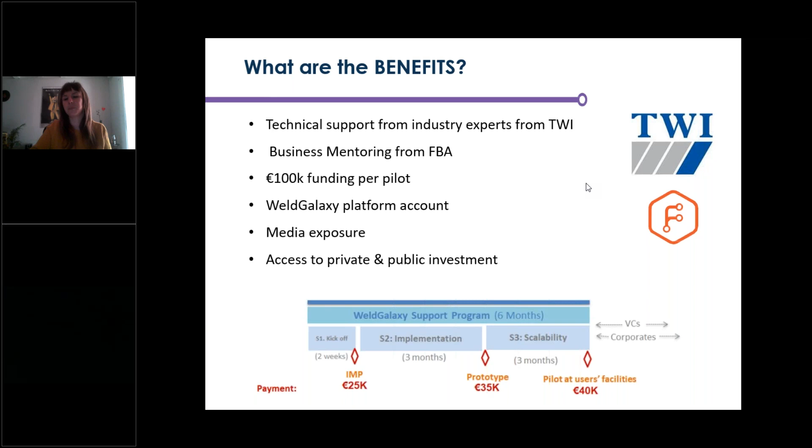And of course, media exposure. By being part of this European initiative, we make it possible to make your success story visible, and also, if possible, to help you with further funding when the project and support ends. So the benefits are multiple.

And who are we looking for? It's important to remember that we are looking for Arc welding solutions specifically, and for solutions that are disruptive and innovative, that actually bring something to the sector.

This will be commented on further by Geoff, but it's important to note it could be either a process, or equipment and consumables. There are different ways to think about innovation—it doesn't have to be only equipment. Processes could also be innovative and bring a lot of innovation and disruption to the sector.

From the legal point of view, we accept the proposals. You can apply as a single applicant, as a single company, or as a consortium.

But what is important to take into account is that your company needs to have an SME or mid-cap status, at least one. If you apply as a single applicant, you need to be the SME or mid-cap. If you apply as a consortium, then at least one company needs to be SME or mid-cap.

If that is a new definition for you, just to let you know how to evaluate or assess if you have this status: you have to check your headcount and annual turnover and check the limits included in the guide for applicants. You can also check the European rules for that, but these two elements are the core when assessing this.

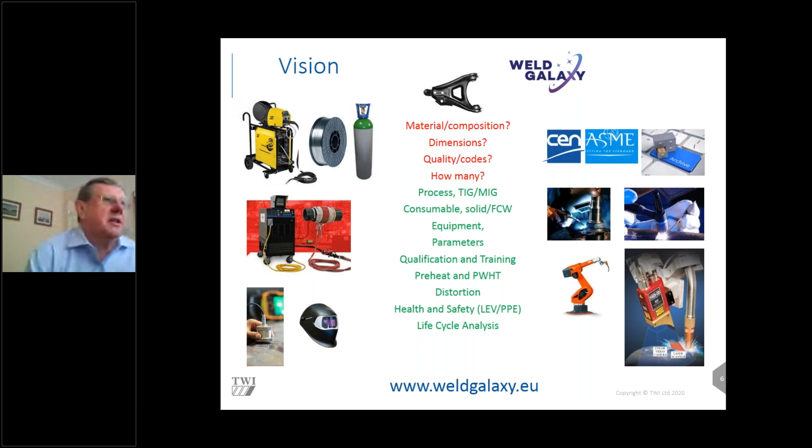There are other aspects too. There are tools on the database for predicting distortion, doing life cycle analysis, etc. So many aspects to the database, but it's all to do with coding knowledge, taking that knowledge from TWI, from equipment and consumable manufacturers, and coding it in a certain way so that it can be accessed in the database.

And here we are, this is the WeldGalaxy platform. On the platform we have knowledge pages. You can go on the platform and look up information about products and processes, and also tools to help you make those decisions in terms of process selectors. There's a tool to look at distortion, and another tool to look at health and safety and environment aspects of the welding process. It's accessed either through the chat box here or directly through typing information into the platform.

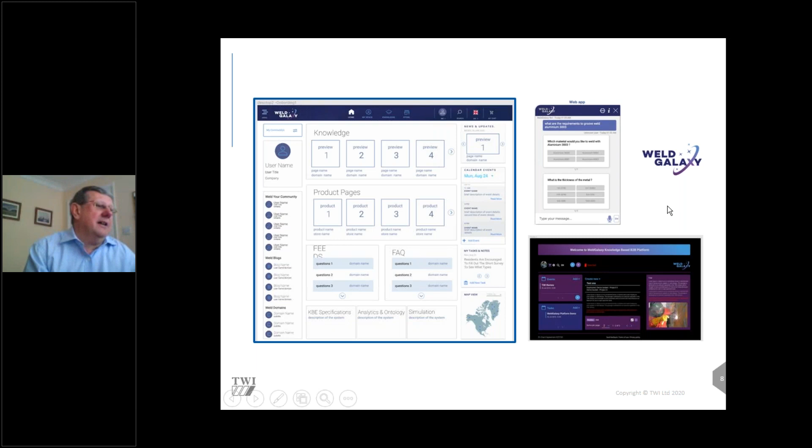This is the realization in the nice WeldGalaxy color scheme. If we look in a little bit more detail, we have the login, the user interface here. Our users will come into the WeldGalaxy platform. The selection of the process and the consumables is done here. We have knowledge pages, and you go in there and find out information about various processes and aspects of welding.

This leads us through to a selection of the appropriate products that can be used for a particular welding application. They go in the basket, and then we come into the more commercial side where we have the suppliers of those products, and then we can go through that transaction, which may be quite simple, maybe just on price, or it may be on performance. It could be simply somebody wants to buy a new item of welding equipment, or somebody looking for a new way to produce a product, needing the whole production line, which will be the equipment, the consumables, the robotics and sensors. So the WeldGalaxy platform offers a safe and secure way of going through that process of selecting a supplier of your products and engaging with them on a commercial basis.

So that is the WeldGalaxy platform, very briefly. To find out more, you can go onto our website, www.weldgalaxy.eu, which has lots of details. It has press releases and a lot more detail about some of the things we're doing in the WeldGalaxy project.

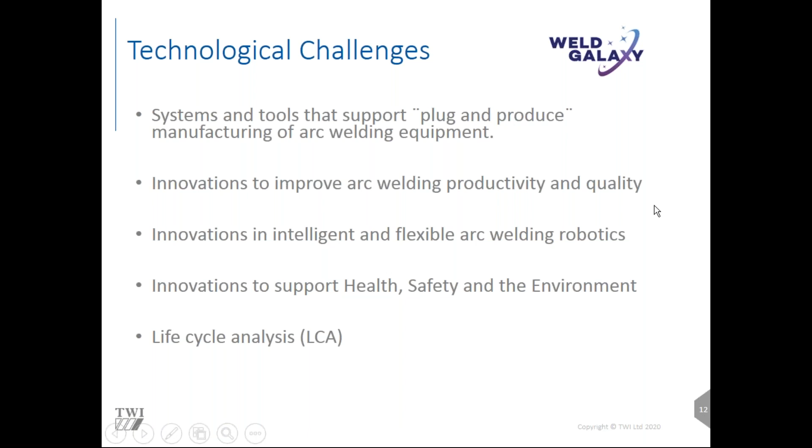Hello, can you hear me? I'm afraid I lost my connection. Yes, yes, we can hear you now. Great to see you back. We lost Geoff around 90 seconds ago - you were about to say you're going to give more details on something, and then we lost you. So if you could pick back up from there, that would be great.

Thank you. Well, not to lose any more time, and apologies to everyone about my dismal internet connection - it's a problem we all face from time to time. It's always unfortunate when it happens during these presentations, but I'll swiftly move on, and hopefully we won't have any more disturbances. I'll give you a little bit more detail about the technological challenges.

The first one is systems and tools that support plug and produce manufacturing of arc welding equipment. Plug and produce - people ask me what that means. To me, it means an item of equipment primarily which can be added to a conventional welding system, whether manual or robotic. You plug it in and it starts producing product, working with the existing welding equipment.

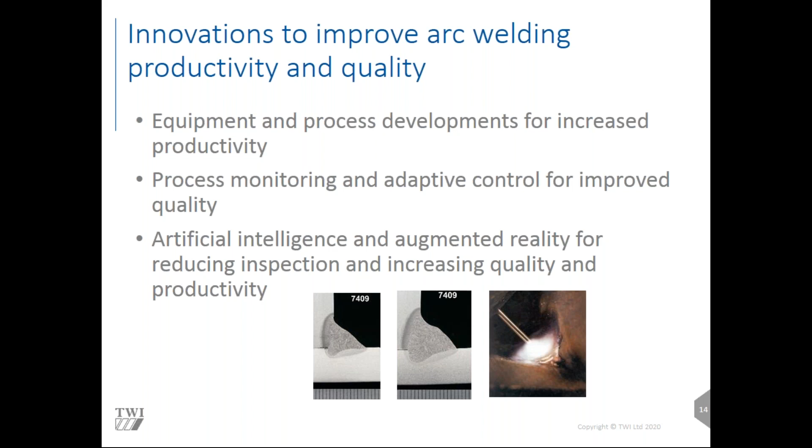Particularly, we're looking at innovations to improve the process - to improve the productivity and quality of an arc weld. There are a number of innovations that have come through in recent years using developments in control, computing power and power electronics, which enable us to make better welds, whether using multi-wire processes to increase productivity, or giving us increased control over the welding arc to improve quality, reduce spatter, and improve consistency. So we're looking at projects that tick these sort of boxes.

We then have robotics. Robotics increasingly becomes important for us, and we'll be looking for seam trackers and sensors - we have a number of projects already in the first call. Also innovations in how we use robots and sensors, using artificial intelligence to tell us more about the process, developments in fixtures and fixturing, and positioning of welding components. You'll hear about one of the very interesting projects we funded in the first call in that area.

We then have also innovations to support health, safety, and the environment. These are increasingly important topics, and there have been recent European regulations in terms of energy efficiency of welding processes. So we're keen to find projects in this area, particularly because these projects need to feed into the WeldGalaxy platform as well. We don't want to look at these projects in isolation - we want the successful pilots to engage on the WeldGalaxy platform to test it, and provide more data to build up the knowledge embedded in the platform for making these decisions.

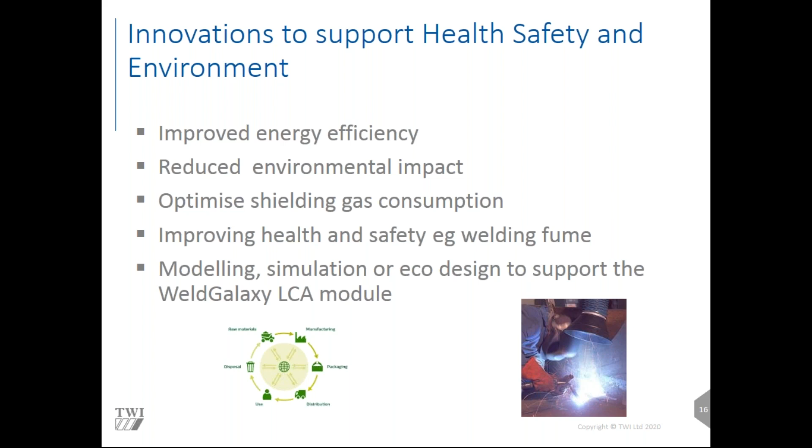So that, very briefly, and apologies for the delay there, is what we're looking for in the projects for this second call.

Once we choose those projects, we will start working with them, with you, with 15 projects, and we do that in two ways: there is technical support from TWI, and there is also business mentoring from FundingBox.

So we have facilities that can be used as a test bed for your innovations, and it's been difficult this last year, as you would already know. We're running the first set of projects, and it's been extremely difficult during the pandemic to organize this sort of support that we hope to provide in the project, where companies can bring their innovations to TWI and we can work with you to evaluate and improve them.

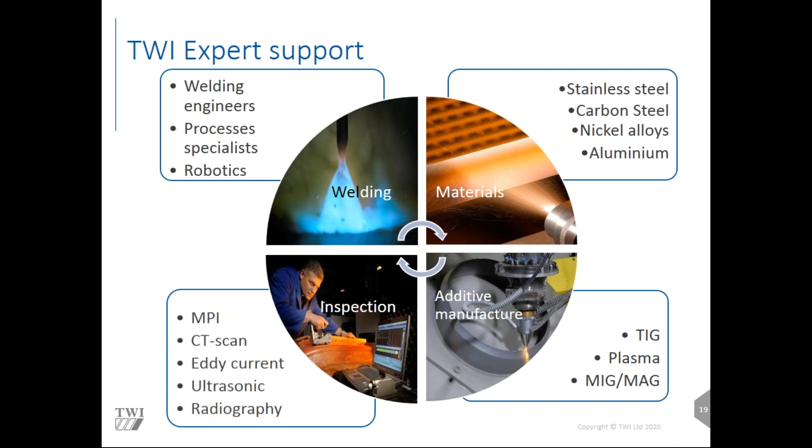So not only do we have the experience, we have the resources, and we have the people, we also have a library on site, and we have a number of information scientists, and they can provide support in terms of literature reviews and other information that may help you develop your innovations, as well as all the information on the TWI website, which includes technical articles, best practice guides, knowledge summaries, etc.

And much of this information is actually being embedded into the WeldGalaxy platform as well, and this is available to you throughout the duration of your projects.

Another aspect, perhaps not so much technical, but also is looking at the market for your products, and we can work with FundingBox and our business industry sector managers in looking at the market for your innovations. And at TWI, we cover all those industry sectors, and we have industry sector managers for each, whether that be for construction engineering, which covers aspects such as bridges and trains, aerospace and automotive, which is self-explanatory, energy and the environment.

Which spans a whole range from nuclear power through to wind and wave technology, electronics, photonics, and medical, which also increasingly is looking at joining technology for electric vehicles and batteries, which is an increasing part of our business, and perhaps that's taken over a bit from what would be our traditional core industry sector, which is the oil, gas, and chemical, which of course, as we all know, is in decline at the moment.

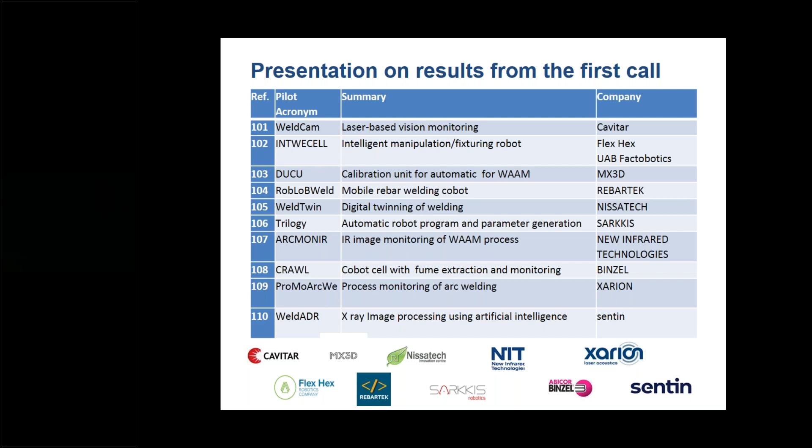Sure, okay, thank you. I can't see who's on, so I'm just assuming there's still an audience there. So I will now launch the second, or indeed the third part of today's webinar, and we've talked about the call that is the current call.

We'd now like to go back and celebrate the success of the 10 projects that were chosen in the first call. So those projects are nearly finished, they finish at the end of the month, so we're just going through that formal sign-off process.

And I would like to basically introduce you to those 10 projects, which I have up on the screen at the moment, and give them an opportunity to make a short presentation about each of their projects and to demonstrate how they've used the WeldGalaxy program to develop their innovations.

You'll see we have a number of projects here, quite a wide range of topics, from robotics through to weld monitoring. There's one project on digital twin of a robot welding system, projects involving artificial intelligence, projects on additive manufacture using an arc process, and also one project which is particularly focused on the environmental and the health and safety aspects of welding.

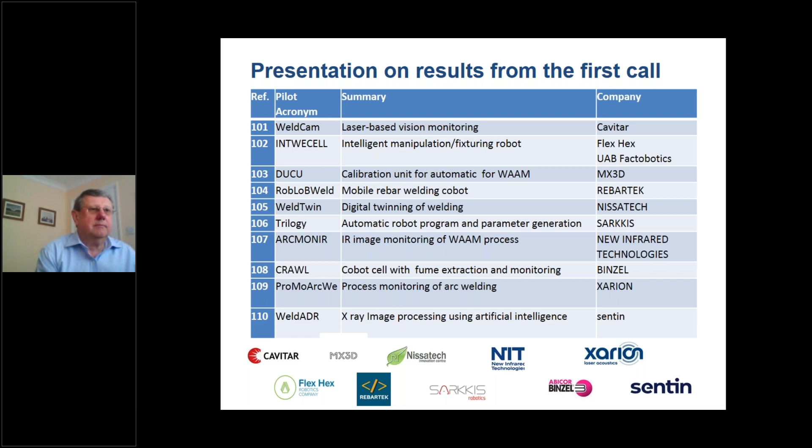So you can see my Outlook calendar right now, but that's going to change soon. Here we go. Yes, we can hear you. We can see the screen too. All right, let's see if I can even get my camera working. That would be great as well. All right, here I am.

Hi everyone, my name is Dominic Nestler. I'm here today presenting for Sentin. Our pilot was called WeldADR. It's basically an automatic and AI-based software solution to detect weld defects on X-ray images. And I want to take you on a quick tour through the program.

I'm going to start off with a short flashback on where we initially began, our initial action plan that we laid out, and then take you through the actions we did in the last 6 months. And then talk a little bit about the support we got from TWI and FundingBox, and top that off with a short video touring around the pilot, showing some features of the software.

This was our initial working plan we laid out together with our mentors Vinod and George. We basically had 5 milestones or working packages we wanted to cover, with some requirements engineering, model training for the AI part, and software development - integrate the model, bring it into the cloud to make it scalable and usable worldwide - and then conduct some user studies to make an intuitive, good to use software for the daily and everyday use, to make the change from current software systems easier, and then some business development during the business mentoring.

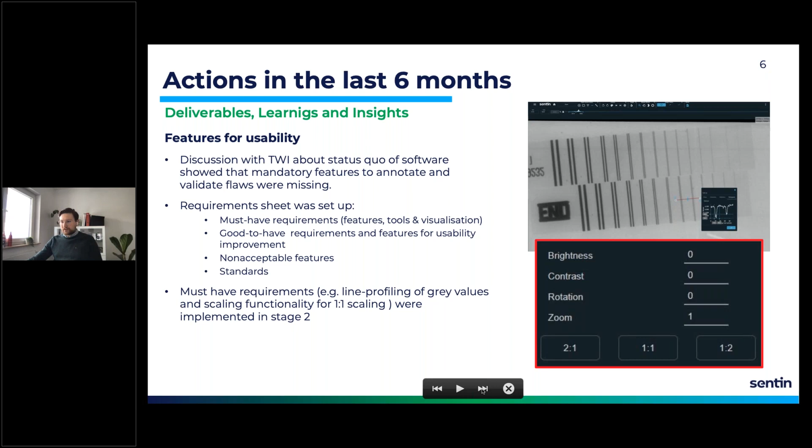The second thing we found out very early in discussions with the experts from TWI is that the image data set we brought into the project, about 7,000 images, had labeling of the defects or imperfections that was not sufficient for AI training in regards to what the actual job looks like. The problem is that the indications or imperfections were all labeled with bounding boxes, leaving too much margin between the actual imperfection and the label. This made it not possible to measure and later verify according to standards and regulations. So we had to adjust that across 7,000 images, which was a hell of a lot of work.

We had to hire a freelancer to change the labeling. On the left-hand side you can see what it looked like before, and what we had to change it to. You can see there's much more detail on each imperfection, no margin, and we changed the way we label defects from bounding boxes to polygons. That was very crucial and took a lot of time, which is why we're still in the process of training an AI model. We already have a first initial model, but it needs updates on performance. We don't cover all flaw types yet with the automatic analysis, but we have great success on the first flaw types. We need to keep going to get the AI performance up.

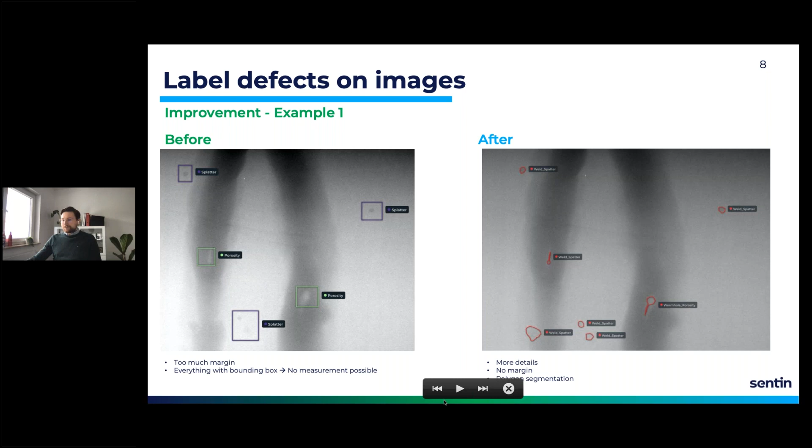Then I want to talk quickly about the user experience study we did. That was very helpful, again working together with TWI, providing expert knowledge. We focused on two main things, functionality and design, to find out if the software was built right, if there were any missing or broken features, if it was intuitive to use, or if there were features that needed a lot of explaining for participants to perform certain tasks. Here too we got really great results that led to fast improvements.

For one example, shown on this slide, the study showed that users attempted to create a new project without entering a file name for it. So we changed it and added a new label to make it clearer how to create a new project. Those are just small things we could change really quickly with the help of TWI and the whole program, which we achieved really fast.

Last but not least, one of the major milestones was the integration of NDT standards. We decided to take ISO 5817 as one of the most common standards, and then integrated ISO 10675-1 for steel, nickel, titanium, and their alloys.

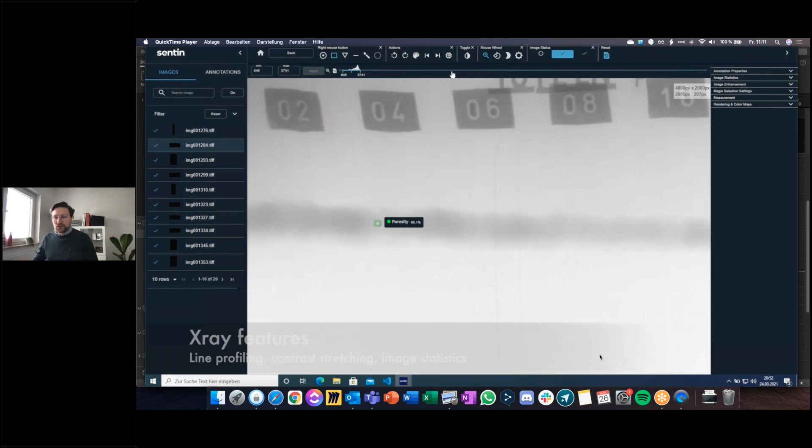So what you'll see now is some of the features I just told you about. This is the line profiling, where you can see the gray value distribution in a certain area. Then we have the color stress, or contrast stretching, where you can optimize the view when examining the X-ray files for a certain window or box. On top of that, you get some image statistics on the images.

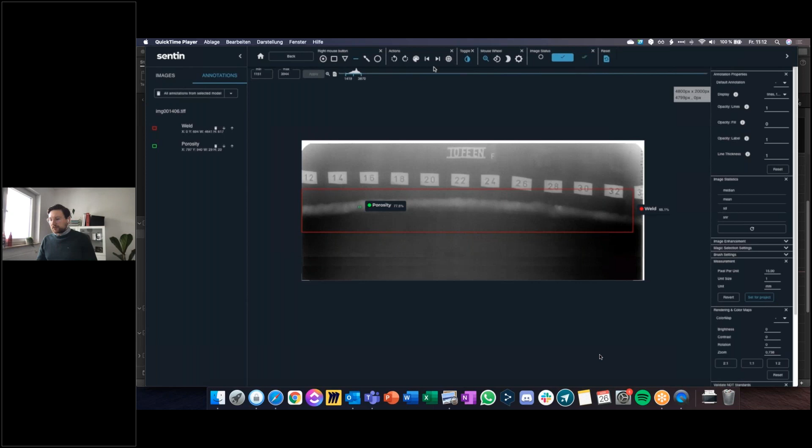Then we go into the next image and hit the evaluate button, and this is where the AI starts evaluating the weld seam. Right here we found some porosities, and we do it on the next image as well. The computing time, by the way, is around 2 seconds on a GPU.

What we have here are detections of welds — so we have a weld detection. Let me pause here real quick. Why do we have a weld detection? It tells us whether the weld is horizontal or vertical. This is really important when it comes to validation, to get heights, lengths, and widths right.

We can also see an indication of probability, although this percentage is not an absolute value — the algorithm is 77.5% certain that it is a porosity. This should be understood as relative: in this marked area, 77.5% of those pixels are classified as porous, and that is where this result comes from.

Once again, this is the line profiling, where you can see the gray value distribution, and this is where we can validate the found flaws according to NDT standards. You can see we changed the standard to level 1, and before that we passed the test. Now we reset it and revalidate, and now we fail — and we get an indication of why the weld seam is not acceptable.

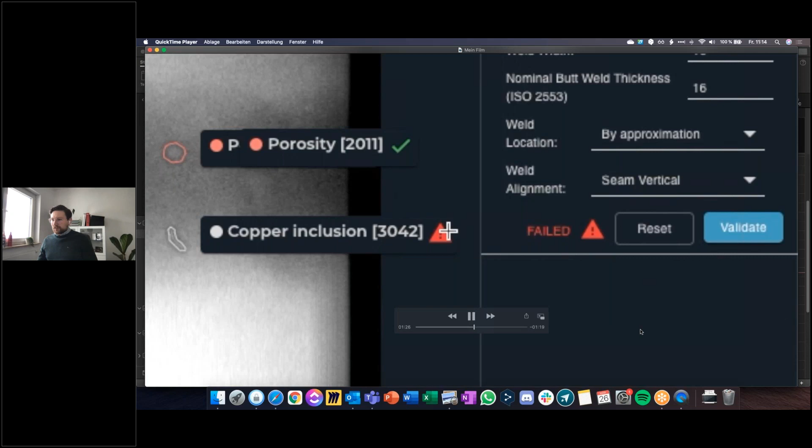And this is basically a very quick glimpse of the software. It continues for a couple more minutes, showing more examples of the automatic acceptance check according to the integrated standard. So that's it from my side. I hope it wasn't too fast of a walkthrough.

I really wanted to show you as much as possible in those 6 to 7 minutes. Thank you very much, and thanks again to George, Isabella, and the whole team. It was great being part of the whole program. Really learned a lot, it was really helpful moving us forward, moving the product forward, moving the weld area forward. Thanks. Thank you, Dominic, thank you so much.

All right, Geoff, apologies here, I actually started reading the list from the bottom. Dominic was actually planned to be in the last pilot, so now we can move on to the actual first pilot that was supposed to present. That would be you, Christian, if I'm not mistaken. So I'm going to make you... Paul, I didn't want to say anything, but I did get a little bit confused then. But thanks, Dominic, that was a great presentation.

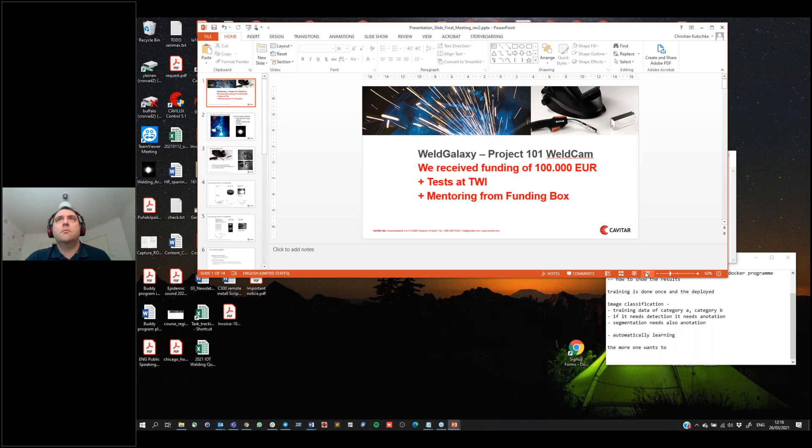Okay, you can go ahead, Christian. Have you prepared some slides to show, or do I share mine? You can share. Okay, all right. Let's see. Do you now see something? Presentation? Yes, all right, great, thank you.

So yes, this is Christian from Cavitar, and our project has been the WeldCam. In the project, we received funding of 100,000 euros. We got to test our camera at TWI, and we also received mentoring from FundingBox, which was very, very helpful for us. So a bit about the background.

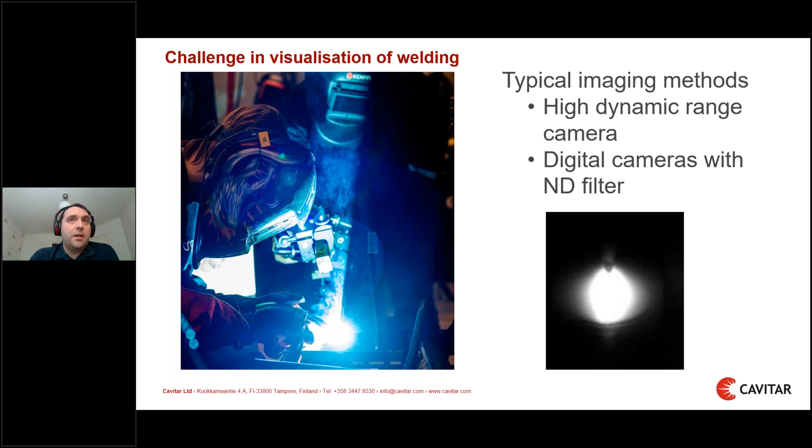A challenge in welding is typically how to see. Welders use masks, but if it comes to cameras, then you're limited to certain things. On the left side you see a normal view; on the right side, some versions where the camera uses filters like neutral density filters, or high dynamic range cameras, another method, based on process light, where you don't really see a lot of details. Cavitar has been over the years an expert in high-speed laser illumination used in welding, and the idea is that you can get a bit clearer image of the welding with the help of active laser illumination.

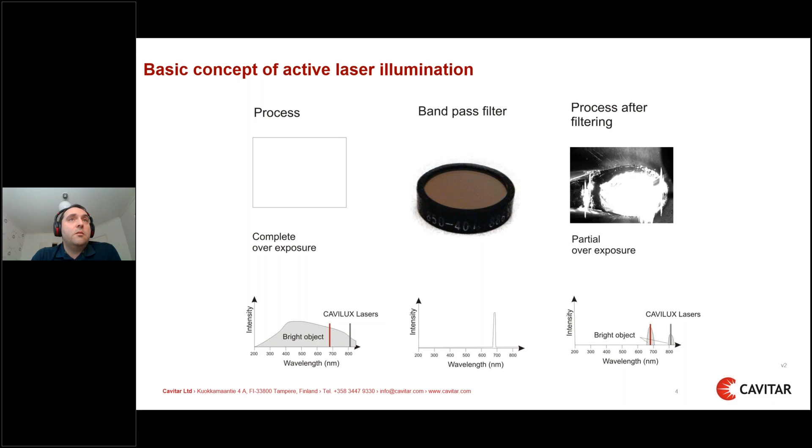The market is mainly for semi-automated and also fully automated welding, and at the moment it provides a live view of the process. It's based on a bandpass filter which filters out most of the process light. Then we have short laser pulses and a short exposure time, which reduces the process light to a minimum but still gives a nice view to the process with full illumination. That's the background of the technology.

In the WeldGalaxy project, we had a couple of goals. We wanted to map the welding processes and also what kind of defects we could see with the camera. We also had goals for product development, improving the product, optimizing for certain situations, and synchronizing process data with video data. One aspect was also to get higher frame rates for troubleshooting. Those were the main goals for the project.

Now we'll go more into the stages that we had. In stage 1, which was about 2 months at the end of last year, we optimized the camera hardware to improve the cooling. We also started development of this arc sync, the idea being that you take a picture matched to a certain part of the process, so you can freeze a certain stage, giving a nice, stable view important for analytics. We started developing our camera with 500 frames, and began evaluating options like cabling, cooling, and data acquisition systems.

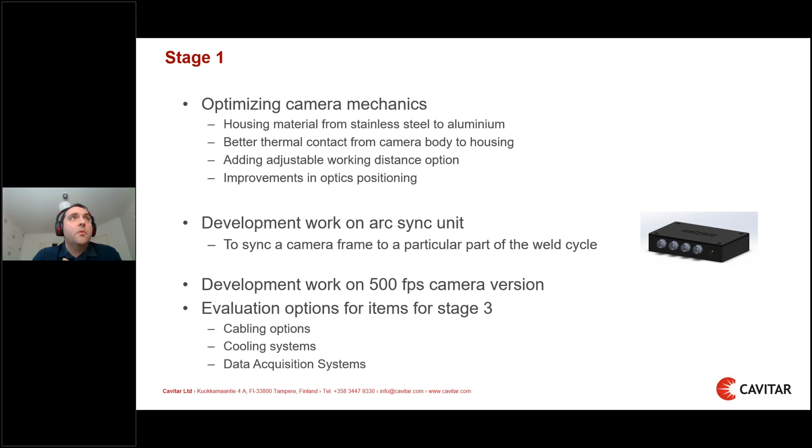After step 1, once we had improvements, TWI came in. We sent the camera and they tested it, checking usability and what kind of things we could see. Overall the setup was quite nice; only the mounting arms we provided were not so rigid, but they found another option to mount those. There were also some improvements suggested for the recording to make it a bit more intuitive, which we got feedback on.

Video quality was overall very good, and I will show you some examples. Here's a TIG cladding example, where one could see the melt pool in the edges. So one can also consider that for automation at some point, to check the position.

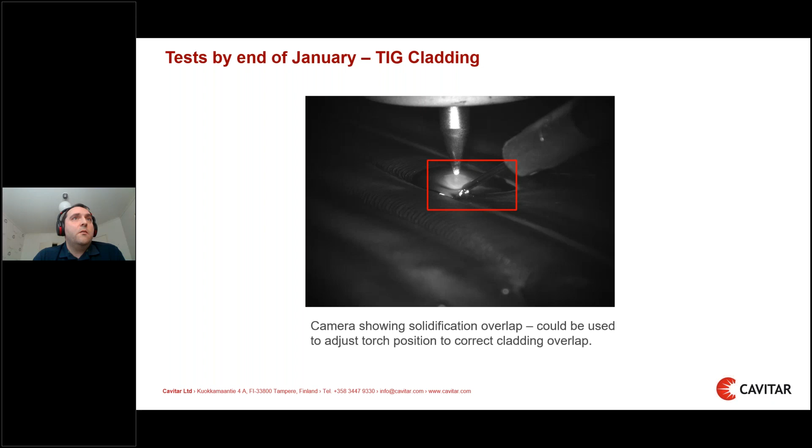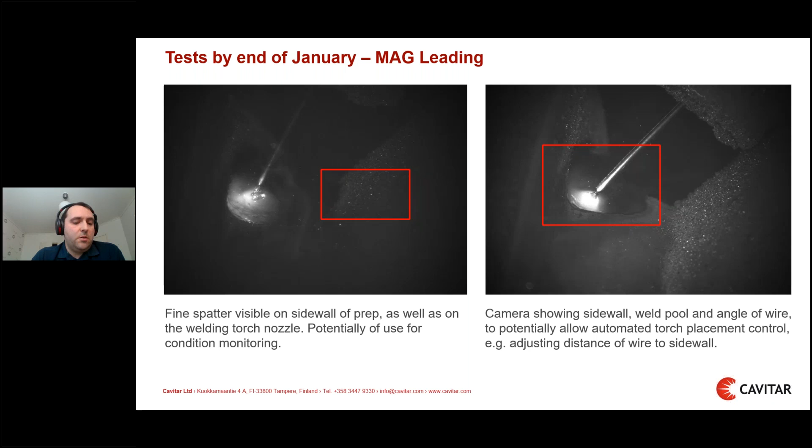Here is an example of MAG welding. On the left side, one can see spatter, and on the right side, one can see the orientation of the wire to the wall, and that can also be good for automation later on.

So then stage 2 started in the beginning of the year. That's when we finalized our camera to get to 500 frames per second. The original model was up to 60 frames per second. We tested robot cables and also had some connectors to bend 90 degrees, which has also been of interest in tight spots.

We finalized the sync unit. We also made a mirror holder for 90-degree viewing, so for example, if you have inside pipe welding, you can put it in there. We also tested a vortex pipe for air cooling, because in some conditions the camera might need cooling, either active water or air. And we also had some different mounting options.

We also had some software improvements, like triggering the recording from an external event. We tested some data acquisition systems, but the one we chose initially didn't work. That would need more customization to get it working from the supplier, and that was not possible anymore in the frame of the project.

And we also tested some AR goggles, to see how that would work with our camera, but the ones we tested were not really fit for industrial use. All the improvements in stage 2, we were not able to test live because the system is still stuck in customs. It was sent end of February. Let's see when it comes. Yeah, that was it.

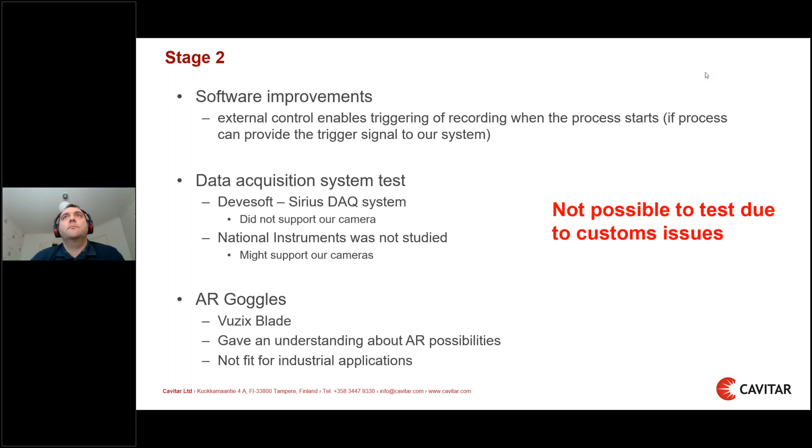Paul, I would just like to make a comment before we move on. Christian, it was unfortunate your camera's stuck in customs, but I just want to reassure everyone that we still hope and plan to do the testing once it arrives at TWI. It's difficult times at the moment in more ways than one, but we want to make sure that we fulfill our role in the project, and we will do those tests as and when we get the camera. So thank you. Okay, thank you, Geoff. Thank you. And also thank you to TWI and the FundingBox team for this project. Thank you. Thank you, okay, Christian.

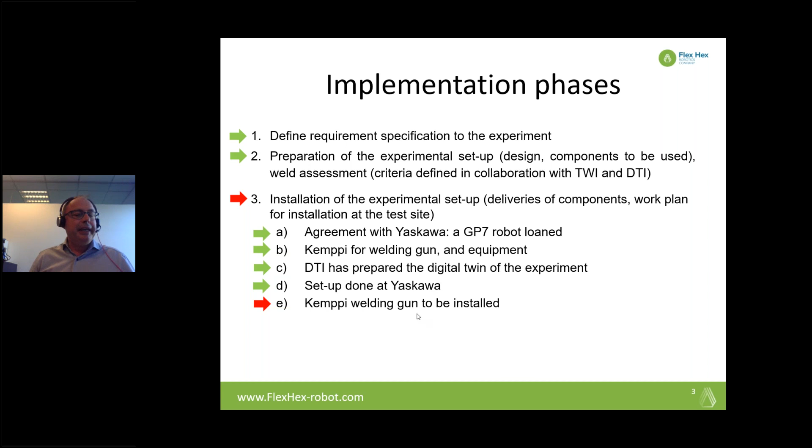And now we are just waiting for the last phase, which is making the welding on the cell. You will see in some moment how it works. Oh, I have a real problem with the mouse.

So here is the experimental setup. The whole cell you see here was developed and made by FlexHex, a robot from Yaskawa, the Kemppi system we have, and then we had to put everything together with all the components, the frames, the hexapod, the different grippers on top of the hexapod.

You can see the whole phase of the project. I just started in January, because before that was the whole design of the cell, and we received the hexapods in January. We made the frame in January. We had to build everything together. We got the Yaskawa robot at the end of January, but we couldn't put it on the cell before the end of February, when we received the frame and things like that.

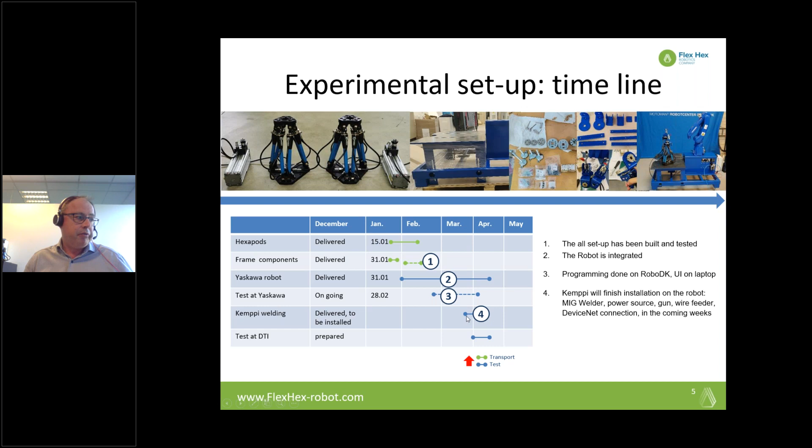So we had some issues with the situation we have in Europe today with the coronavirus. Things have been quite difficult to deliver. But we succeeded in making the programming of the cell and making the first setup. As I said before, we have all the equipment from Kemppi for making the welding, but it is going to be installed right now for this.

So here you can see the whole cell built with the hexapod and the robots. We have made some setup of that. We have the robot program working for the whole cell. We have this digital twin from DTI working, so we know exactly the position of the hexapod.

We have made 3 different setups for the cell to test its ability to change from one configuration to another, and it's working quite well. So here I will show you hopefully a video. Can you see it without problem? Yeah, it works perfectly. Good.

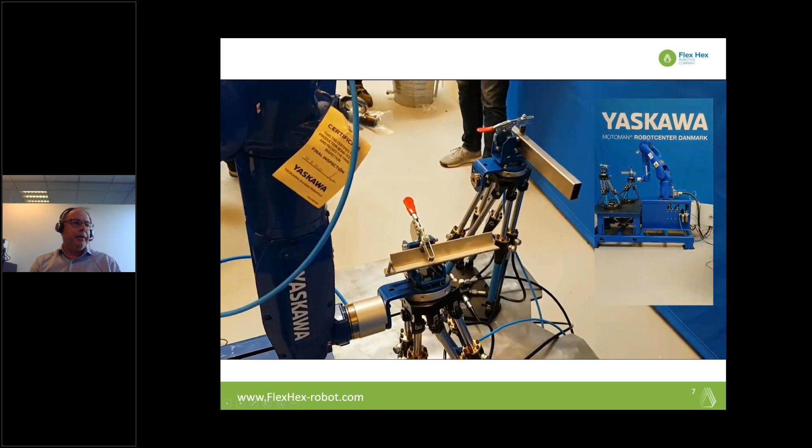So here you can see the robot configuring the cell. We have already put the element to be welded on the cell, and here it is adjusting. This is the first setup, where we have verified the distance where it places the element, and the idea is that the robot will make the welding after that.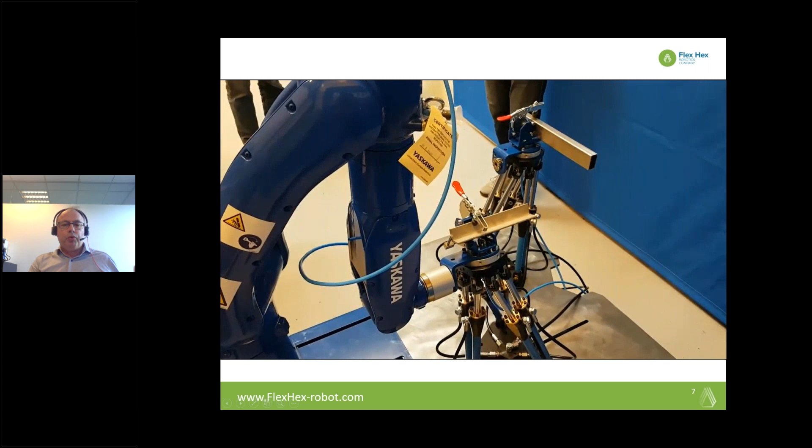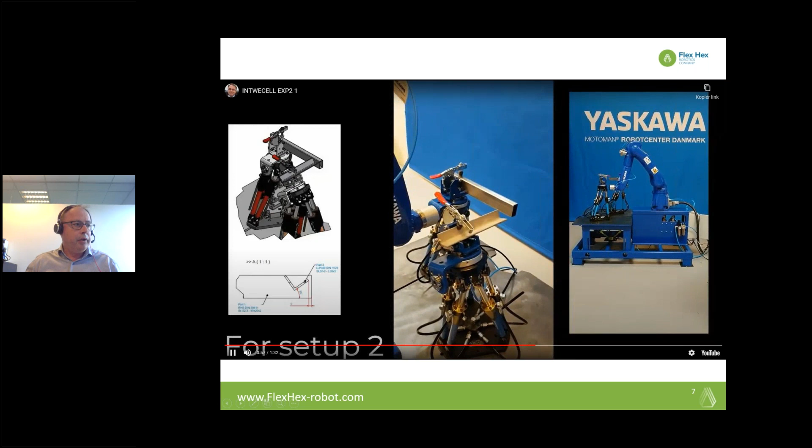The robot is positioning the cell back to home position, zero position, and then ready to configure the next setup. So adjusting the fixture again, placing the part in position for welding. Here you can see we have changed the distance to the edge, and also rotated the element in a different way to be placed.

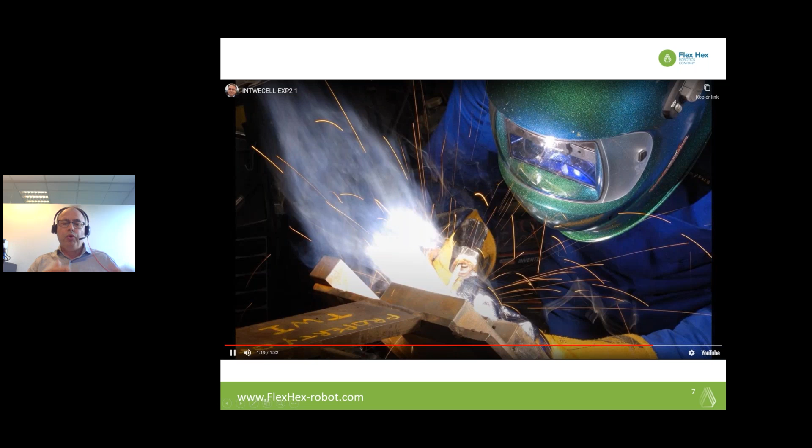This is the last setup we tested - again a different setup, a different geometry, a different angle of the part. The whole idea is that after this, the robot takes the welding head and makes the welding on the cell.

So a very interesting project, I will say. We succeeded in doing as much as we could during the 6 months, which is always, of course, very pressing in time. So now we are just installing for making the welding on the part.

From the support we got from TWI and FundingBox, our mentor Lei was a very good help. We had a meeting every 2 weeks where we evaluated the technology and had technical discussions together. We defined the welding assessment together, and Lei helped us validate the report and all the support work we've done.

From the FundingBox area, the marketplace I'll show you, and business development, we had quite good and interesting discussions on the WeldGalaxy platform. When we implement our products and legal entities, we are starting to make some knowledge pages and some blogs also inside the system, so it's working quite well.

On the business development side, we have also built all the canvas business activities, all the different blocks that we need for that, and it's working quite well. We have good support for that.

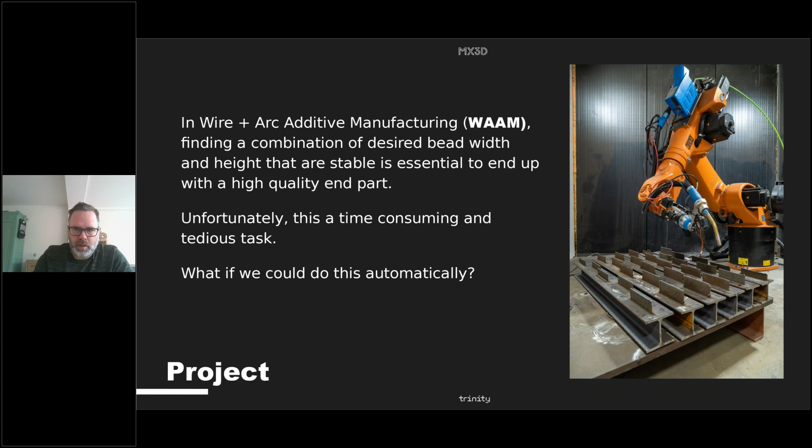I see there's a mistake in the bottom there. So our idea was to print a number of walls, each with their own parameter set, and to measure the resulting properties, all automated. The two most important factors for controlling the weld are the travel speed and the wire feed speed. We decided to focus first on these two, but with our solution it should be trivial to vary other parameters as well.

A procedure has been developed that takes a configuration file defining how the experiment should run: the parameters to be varied, the ranges, the step sizes, the number of layers to be printed, the desired inter-pass temperature, and so on. The desired welding parameters are communicated from the industrial PC to the robot, which in turn controls the welding machine on the fly and sets the desired wire feed speed, for example.

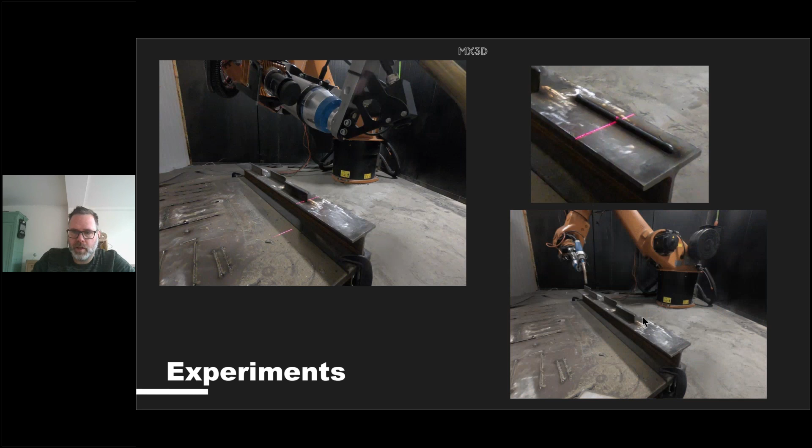Then the operator points the robot to the starting position on the substrate, and the process runs automatically. It starts with a scan of the substrate, then the robot prints the first layer of the first wall, and it's scanned again. The results are saved, the toolpath of the next layer is calculated automatically, and the next layer is printed. You can see a time lapse on the right side, where we try to minimize the warping of the substrate by alternating the position on the beam. On the left side, the robot is doing a scan, and zoomed in on the upper right, you can see a projection of the laser blade scanning the wall.

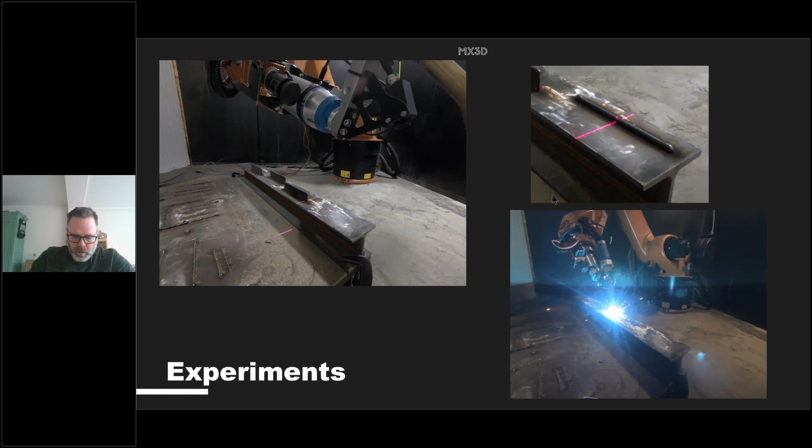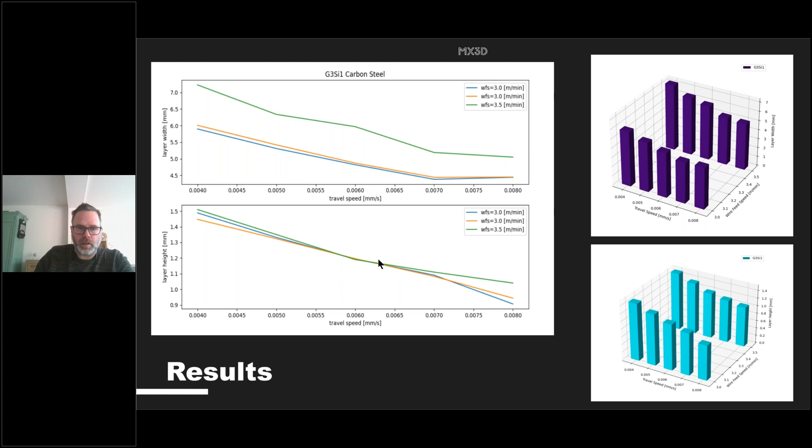Yeah, that's our WeldGalaxy project. Special thanks to our mentor Adrian. It was a blast, we had great fun doing this. So thank you.

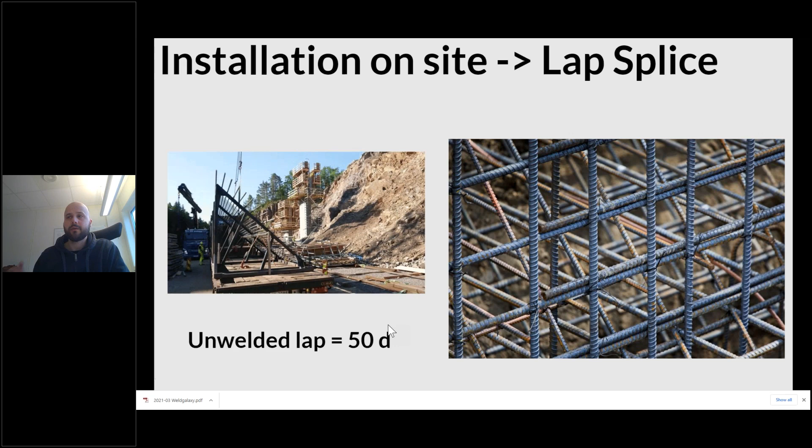That's a lot of steel, and it also makes joining the cages on the site more difficult. So what we are doing in the WeldGalaxy project is building a prototype for load-bearing welding of rebars on the construction site.

I'd love to show you pictures of the prototype, but there's an NDA and patents involved, so we chose not to show anything at the moment. During the six months we built several iterations of this prototype and also tested it together with TWI and a local lab here.

What you see on the left-hand side are a few samples that we have welded. You see they're bent a little bit because of the testing process afterward. On the right-hand side, you see some tests we have run with our solution, with our prototype.

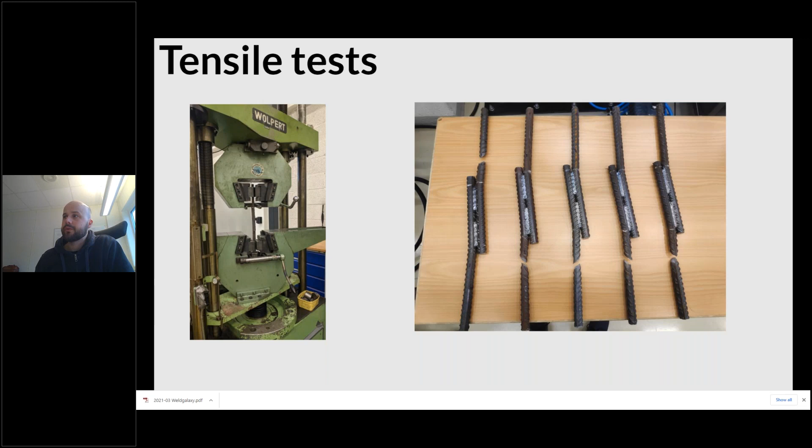One of the main reasons to weld them is that you can reduce the lap lengths a lot, to 10 times the diameter, if they're welded properly. We bent them a little bit so they fit in the machine. These are tensile tests we have run, and it's nice because they didn't fail in the weld.

We've also tested the first version of our machine vision, where we basically check the welds by visual inspection. It works quite okay, but our data set is way too small. The data set we built for the test is very small, so we need to build a much bigger one.

Together with TWI, we've looked into one of the big challenges: once you weld the rebars, a big concern of customers is the change in fatigue properties of the steel. For example, if you're putting rebars in bridges, they have dynamic swinging loads, and then the fatigue properties of the rebar are important.

Here we got help, it's an ongoing thing with TWI right now, to basically make a literature review of what kind of existing research is already out there on fatigue.

Then, together with Carlos our business mentor, and FundingBox, we did workshops on our business model and made these Miro boards, which I find to actually be a very interesting tool. I didn't know about this tool, so it's a nice collaborative tool for thinking out loud together visually. I found that very helpful.

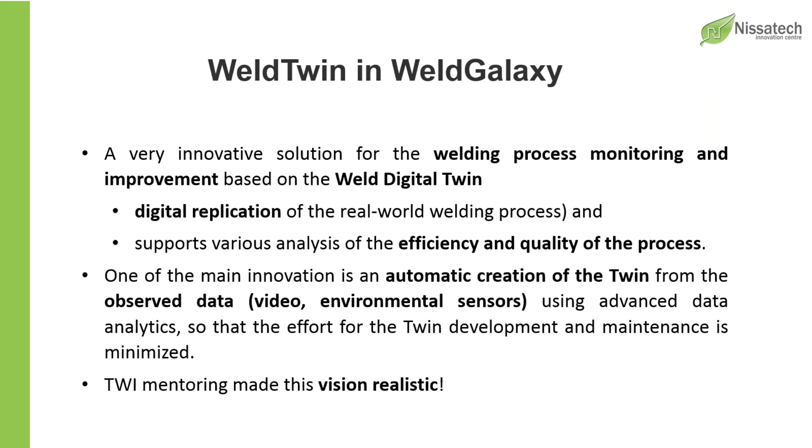It's about introducing digital twins into WeldGalaxy, in the welding process. There's an extremely interesting innovation regarding how you can introduce digital twins to support the monitoring and quality of the weld. Usually with digital twins you have an issue in developing these things, because you have to model, or do a lot of data-driven processing, meaning analytics. Since we have a company doing this production of twins out of the data in a very efficient way, this is exactly what we use here to produce digital twins for the welding efficiently. And the last bullet point is extremely important, because TWI mentoring actually made this vision realistic.

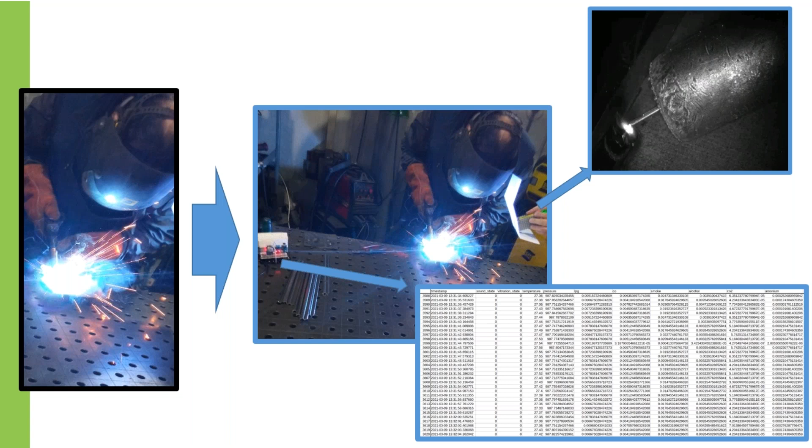What we are doing is collecting all this data, recording the data, and with the environmental sensors we are recording all these sensors. There are kind of 15 sensors, and you're getting a batch of numbers which reflect what is going on regarding the environmental context during the welding.

Now it's the place to say thanks to the TWI support, because what we're using here is a Cavitar camera, thanks to Christian, who is also here in the teleconference. When we started with Rob, who is our mentor, discussing cameras and so on, we had a list of cameras, and then he made this connection with Christian, who was extremely friendly and cooperative, and they sent us the camera, which is still in our place, and we are using it. So as very practical evidence of how we are really benefiting in a practical sense from being part of this consortium—once again, thanks to Rob, thanks to Christian, I really enjoyed the cooperation in this context.

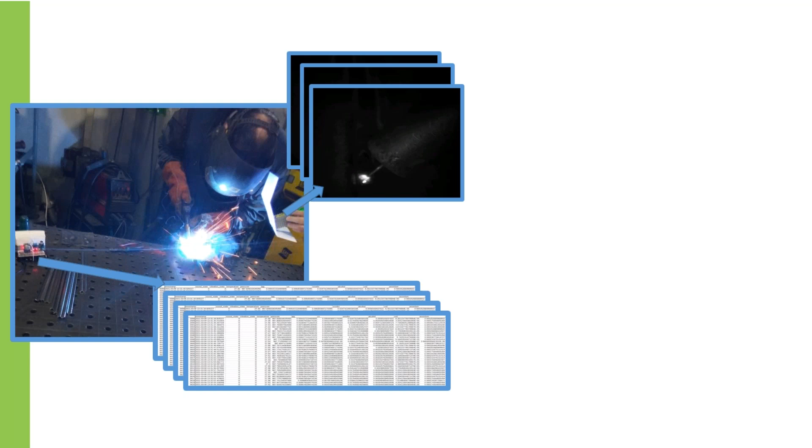Now coming back to the presentation, what we are actually doing—just imagine collecting all these scenes and all this data, and we would like to learn something out of this in order to simulate the behavior of this welding process. This is exactly the digital twin: a digital replica of your asset, of your process. In this case it's a welding process, and we are applying different types of AI.

In this case it's deep learning, but a very specific one, because usually for deep learning you need hundreds of thousands of photos to learn something. Since in this case we are trying to learn some anomalies in the welding, the challenge was how you can learn anomalies without having thousands of anomalous photos. This is where we are applying some one-shot algorithms and other algorithms for accelerating deep learning, to learn with less data, high quality classification algorithms or classification methods.

And this is the model which is then used for classifying. So in real time, just imagine you are applying the camera, recording something, and the system is deciding—you can see with red and green boxes if this is good or bad.

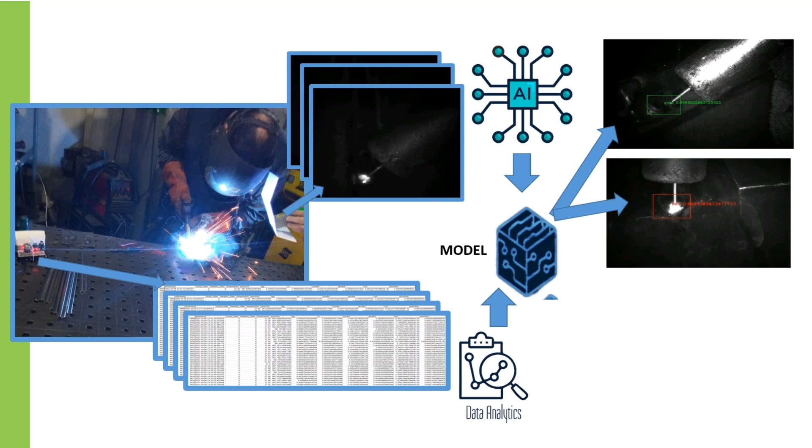Something very novel here is that we are also using statistical learning. On the bottom side we have the sensor data, and from this sensor data we are using statistical learning plus machine learning, in the context of data analytics, to develop models for detecting anomalies, multivariant anomalies in the data.

So this part of the model is the algorithm, which is based on the readings from the sensors, deciding if in this particular case there is some unusuality in the temperature, smoke, CO2, or whatever, but in the multivariant context. This is tricky since we are not comparing one parameter by one parameter, but taking all of them in an n-dimensional space. In this case, it's 15 dimensions, and we are trying to develop these kinds of models.

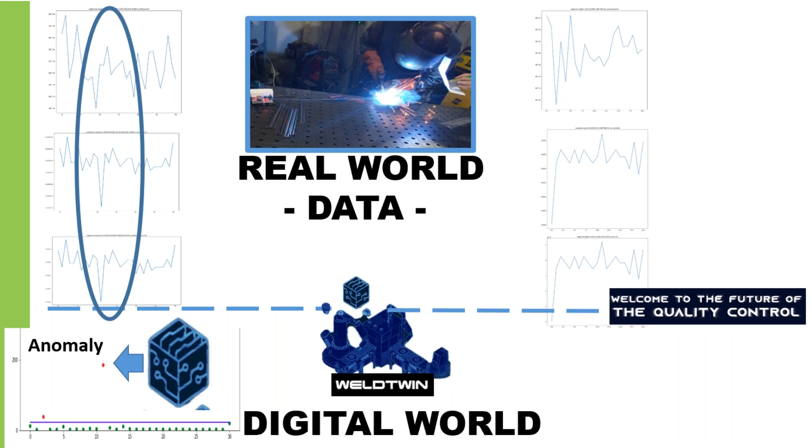And this is our main artifact or goal or result - this weld twin. The main idea here is that we are dividing real world and digital world. From the real world, we are getting the signals, so you have the physical signal sensors. In the digital world, we are interpreting these signals based on the models in order to detect anomalies. So in the real world we are catching things, and in a digital world we are transforming them in order to do proactive detection of anomalies.

Okay, this is another example. You can see here on the slides, left or right, this multivariant case. We are not considering parameter by parameter. We are taking, and this is statistical learning, all of them together in order to develop these models for anomalies.

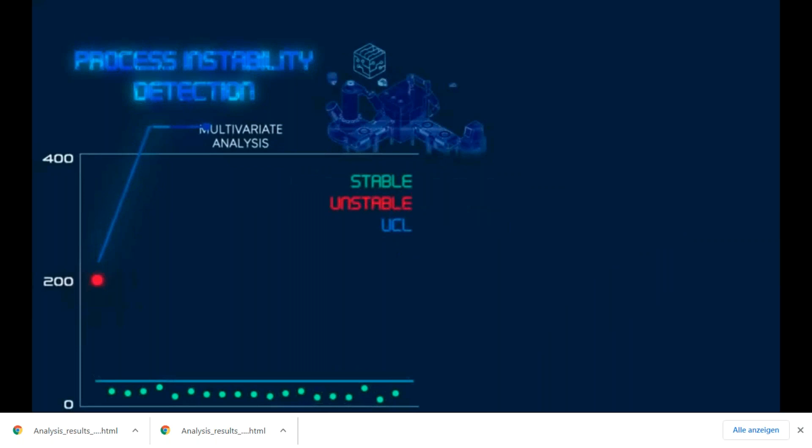So obviously, because there is no audio coverage, but I'm explaining now how we are building the tree. It's using data collection, and the data is collected, then there's a training process, and the tree is learning something out of the collected data. A solution is found, or hasn't been found. The solution is now applied - the solution is a model. Now in real time, this thing is observing, alerting once the model has been, let's say, destroyed, and there's also root cause analysis. We can find out which of these 15 parameters was wrong actually.

You see some of those. And these are the technologies we are using - first of all digital twin in order to model the assets, then artificial intelligence for learning, and data analytics for applying this all in real time. From the data, we are learning the models. These models are then put in place for analytics, which detect anomalies. It's a pity that you don't get the audio coverage, but anyway.

And we are claiming this is the future of quality control, because you are really able to control your system in a very multivariate way. So taking into account all these very specific elements which usually you are not covering, by having them together in the weld twin, you can really make a universal solution.

Sorry for probably going up and down, but anyway, I hope that you have understood, and I'm open for questions. Thank you. Thank you, Nenad. No, I think it was great. We understood everything. Just okay, thank you. But other than that, everything perfect. Okay, cool.

Sorry for that. So now I'll be... Well, we actually have a question for you, Nenad, from Lei. Very nice presentation, Nenad. A quick question, if I may: could those environment sensors get affected by arc welding processes, fume, flash, spatter, etc.?

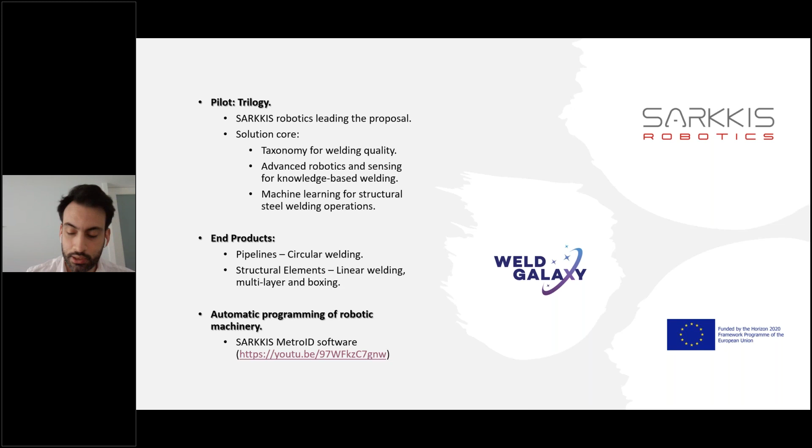To sum up the main goals of SARKKIS software, we have four points. The first is automatic visual detection of the 3D device and translation to robotic motion, which is mainly the sensing. Then we have automatic repositioning for high redundancy robotic systems, which defines the posture for the robot in this step.

We also have software that lets the robot take on the full extent of the human operator, where we can provide the user correct information on what's going to happen and how it's going to happen in the real work cell.

And then at last, the process and motion generation is the output of the pilot and of the software itself. So just a small preview of the software.

Our software is essentially an offline programming solution where we generate welding vectors from the joints of the parts that need to be welded.

Then we correct the vectors to avoid collisions and to avoid issues with access to the parts and to the welds themselves.

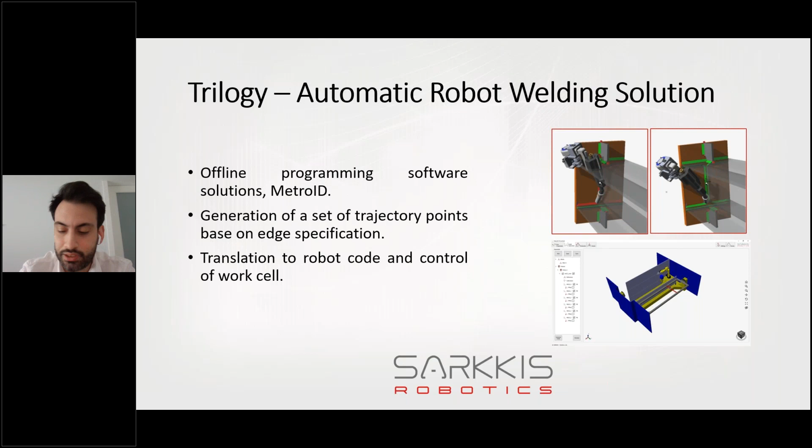Once we do that, we correct the vectors and add the robot on top. We translate everything to robot code, and we can perform the weld or process associated to the robot. In this case, it's always a weld.

For the trilogy itself, machine learning was one of the main outputs of our solution. We tried several approaches and verified that the best one was using random forests.

How this works: we have welding parameters defined in our taxonomy, and we have the measured results, typically the volumes. We use a laser line to detect the volumes, the visual aspect of the weld, and also some stress tests on the weld, because it needs to be resistant. Those were the main outputs.

Using and combining those in the random forest algorithm, we were able to define a classification model, and then we applied the prediction stage, which is the second stage.

We had the classification to detect if the weld is good or not using some parameters. Then the second stage gets the right parameters from the classification model we created, for the measured results we have and want to have.

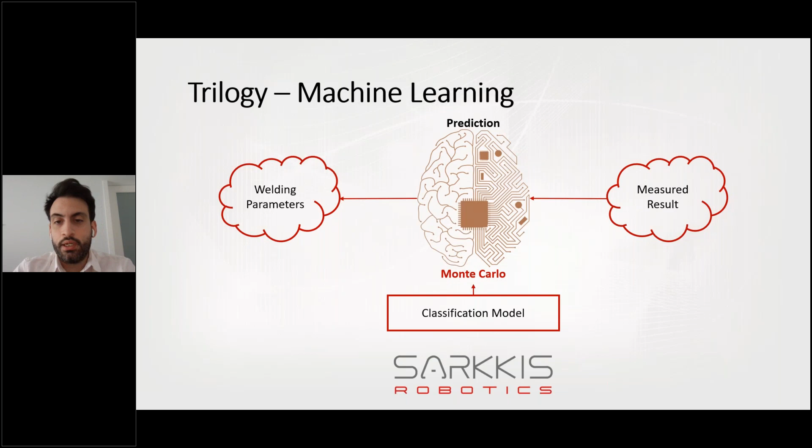We have good accuracy rates, and the most important contribution of the project is that we ensure the quality of the weld is good, and we also increase the uptime of the work cell.

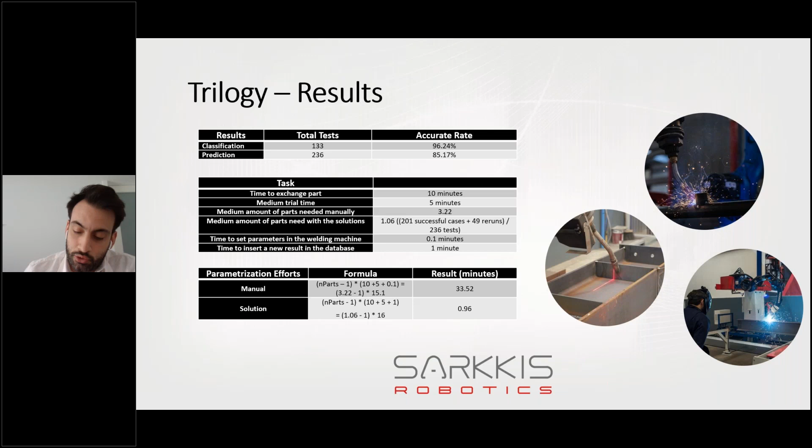So that was my presentation. I'm now open for questions.

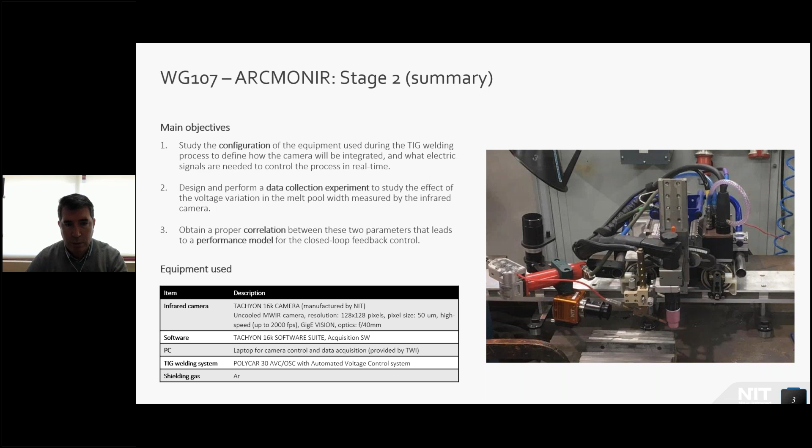Then we made a second experiment using a sample with 2 copper heat sinks on the sides, so we could see the effect on melt pool width as the process passes next to areas with larger heat dissipation.

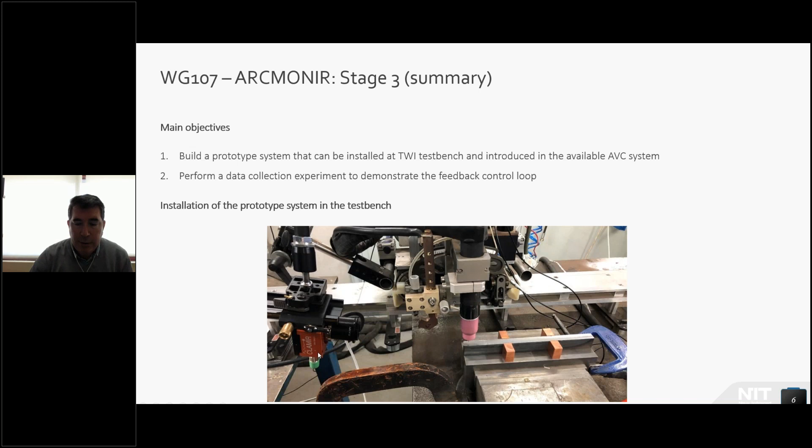This is the system that will look at the process area. In this case, you can see the sample with the two copper heat sinks, and it will perform the closed loop control of the arc voltage. The idea is to keep the melt pool width constant during the complete process, which will increase the quality of the process.

The experiments we did, once we had integrated the camera and were sure the closed loop control of the voltage was working, we made a couple of experiments just to demonstrate the feedback control loop. In this case, we used the samples again with the two side heat sinks because we wanted to see if the camera is capable of controlling the melt pool width in these areas.

We also used a wedge sample, which increases the area, and this has an effect on the area of diffusion and therefore on the melt pool width. Just to simplify, I'm going to show you the results of experiments T3 and T4, which are shown in this slide.

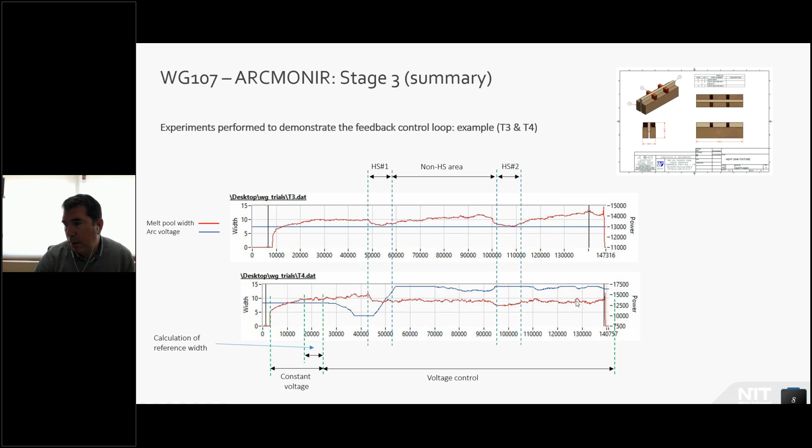And when we get to the second heat sink, it goes down a little bit again, but not as much as in the non-controlled process. Then the melt pool remains again around the initial value.

So just to summarize, in these experiments for ARCMONIR, we have demonstrated that there is a direct correlation between the applied voltage to the arc and the measured melt pool width with the camera that we are using.

We have developed a prototype that has been installed in the test bench, and this allows us to monitor the melt pool area during the weld process, calculate the melt pool width, and control the arc voltage during the welding process. This leads to a better quality of the process.

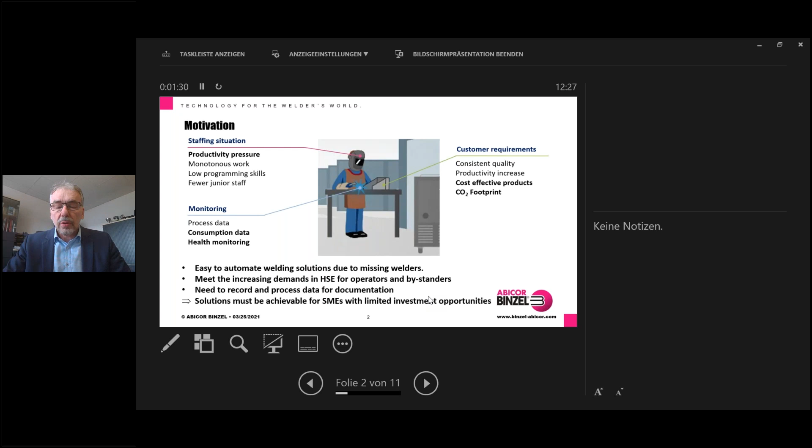So that was the starting point of the crawl concept, this intelligent and safe robotic cell to address the staffing situation. We said, okay, using a collaborative robot should be good for high productivity.

These cobots need very few programming skills. You can learn to program the robot in less than 1 hour, and of course the welder has no physical stress. You can also achieve all the customer requirements—a robot always has constant quality and high flexibility. And a cobot cell starts at around 40,000 euros, so that's a decent sum.

With our innovation, we implemented monitoring of both live and recorded data, and we can evaluate consumption data—I'll show you in a minute. We also applied fume extraction directly at the robotic welding source, meaning more than 95% of all welding fumes can be collected directly where they are generated.

So how does such a cell look like? We built it up in our application center and granted live access to TWI so they could witness and support us. The main components are the cobot, the collaborative robot, and a welding power source. In addition, we added a fume extraction system, a gas monitoring system which allows us to save 50% of the shielding gas, a power meter to collect total energy use, and ambient monitoring for the created fume. Everything was built into a cabinet to protect the welders or machine users from the arc.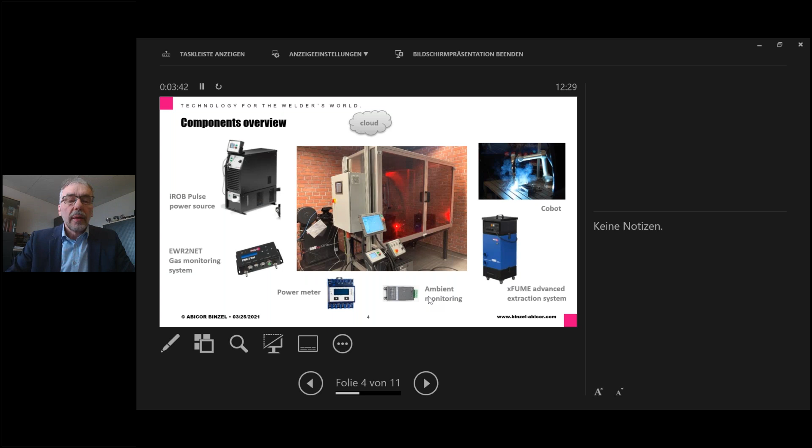In the next slide, I'll show you 2 videos in parallel where you can see live welding and also the live recording of the data. The video runs for 1 minute, so I'll have time to explain. On the left side you'll see what happens with the fume extraction on, compared to a situation with the extraction off. Please note that we have a very small welding sample here, so the welding time is quite short, and you'll also see that in the data generation, especially in the fume values. I'll start the video now.

We display the electrical parameters of the welding process, so voltage and amperage, and also the gas flow and the wire usage. From these parameters, we can also collect and record the energy usage and the CO2 footprint.

On the lower sensors, you can see the fume emission, and you can see that now the process has stopped. We still measure only very low fumes because the dust sensors are placed at a height of 1 meter 80 centimeters, where a normal user would stand. You can see that now the fume reaches the sensors in the situation where the extraction is off. We end up at a value of maybe around maximum 600 micrograms per cubic meter, which is still below the legal limits. But of course, if you imagine welding bigger parts or having longer weld times, you would go over these limits.

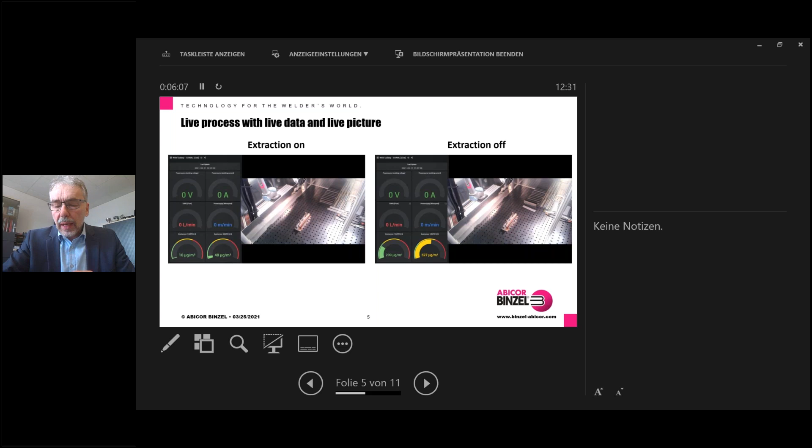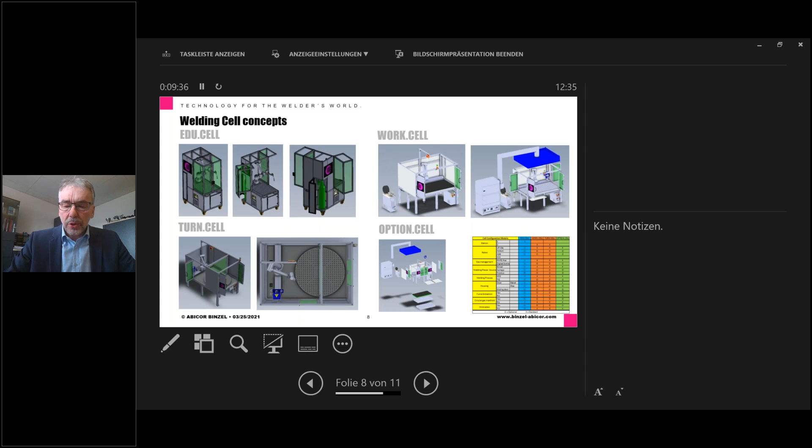We did achieve all this within 6 months, and this was only possible with the great support from our TWI mentor, Job Melton, and also our business mentor from FundingBox, Mortisa Eftikar. Both gave very valuable input and were always there for us. We had intensive discussions - excellent technical input from TWI, but also very valuable input regarding business models and customer journey from Mortisa. So thanks again for this.

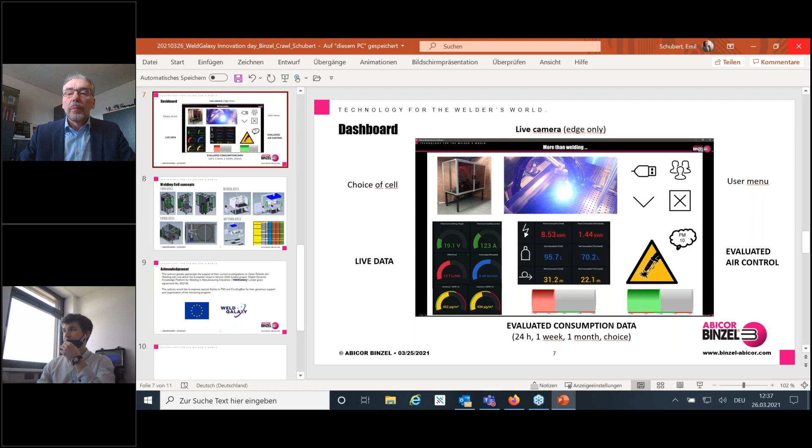And Ryan, hi, the floor is yours right now. I hope you can hear me. Yep, we can hear you. Okay, very nice, so apologies for the mask, but for obvious reasons.

We're sitting with some colleagues in the room. Can you see my screen? For now it's still a black screen. Okay, I'm gonna do it the simple way. Here we are, so that would be this one. Now we can see it, yes, okay nice. Now it's probably moved to the other side, sorry, yeah. Great, can you see it? Yeah, we can see it, okay perfect.

So I want to present our pilot project called Promo ArcWe, process monitoring of arc welding. And we've been doing that using the acoustic emission from the process.

I want to give you a short starting point introduction, so where did we start initially before we kicked off with the project. Then I'll give you our insights and our steps of development and results during the 6 months, and finish off with a thank you.

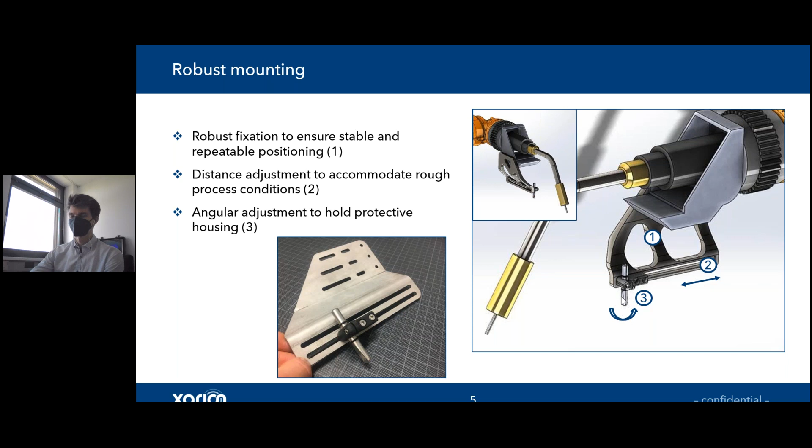So the first thing we addressed was which defects do we actually want to see, which are interesting for this particular process and for the users of this process, and which can we see with the acoustic emission. We ended up focusing on the defects of pores, lack of shielding gas, and cracks. These are things that we could quite clearly detect with the rich information that we had, so we focused on those.

We performed multiple tests at the facility here at the Technical University of Vienna. We were able to move there, it couldn't go to TWI so easily. Here you see the robot, and actually this is still the kind of lab style mounting equipment, but that's the position of the microphone where the data was captured.

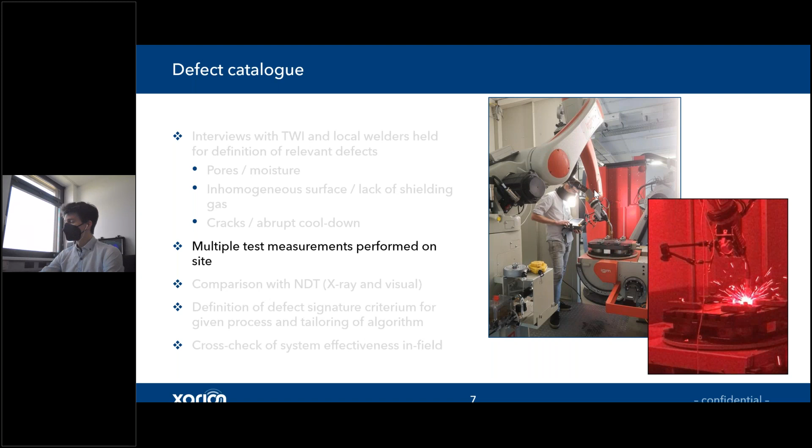We did a comparison with X-ray images. It would actually be really interesting to have the software, the AI software from the first talk, run over these. These X-rays were done by TWI, so thanks on that note. We compared our acoustic emission and also the visual with the X-ray images, and more on that later.

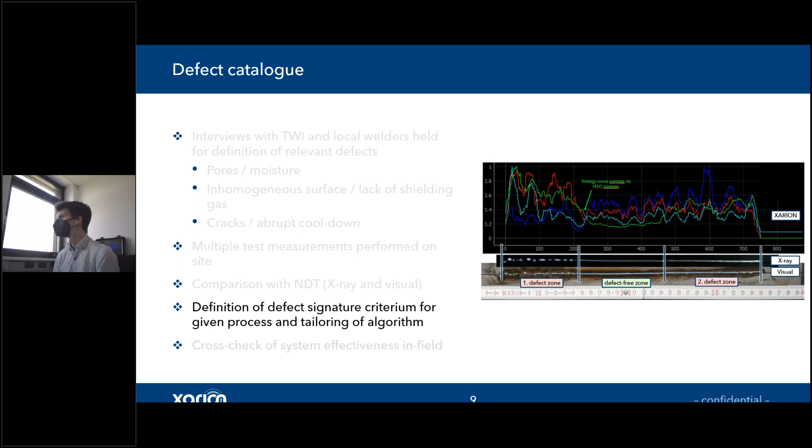Here, for instance, we showed the comparison of our signals to the defect, and what we employed was different criteria for each of the 3 defects mentioned previously. So each of these defects has a certain signature in a different frequency band, and that's what we found out there, and we tailored our algorithms to find these 3 defects in 4 different frequency bands.

And then we did a cross-check in the field to see how well it really detects all the defects that we set up. So that was on the defect catalog side.

The second thing was to develop a software interface, a GUI, which enables direct feedback about these 3 defect types. What you see on that software is, first of all, the spectrogram, the acoustic fingerprint of the entire process, which is very helpful for orientation. You then see the energy curves, the curves within the 4 specified frequency bands, which allow us to find the defects.

And then in this box, you get the output or the evaluation result. Again, here are our 3 defined defects, and you are able to adapt the thresholds according to your given process, and it allows you to directly see the defect detection rates.

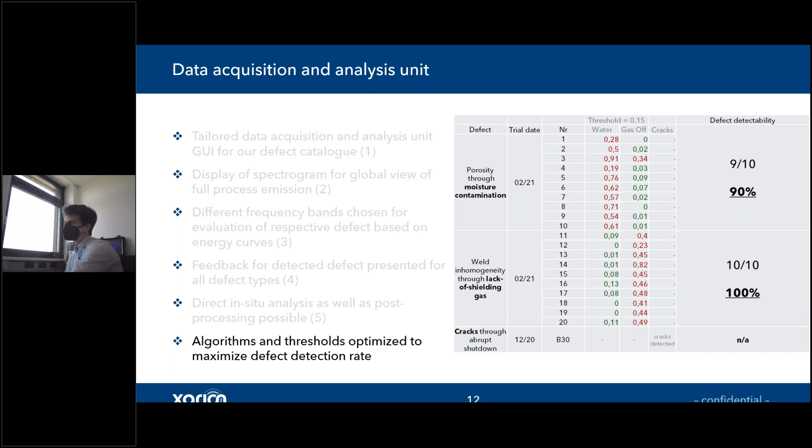We did, however, confirm on an audible basis that cracks occurred, and we also detected cracks. So that's the sum up of the project.